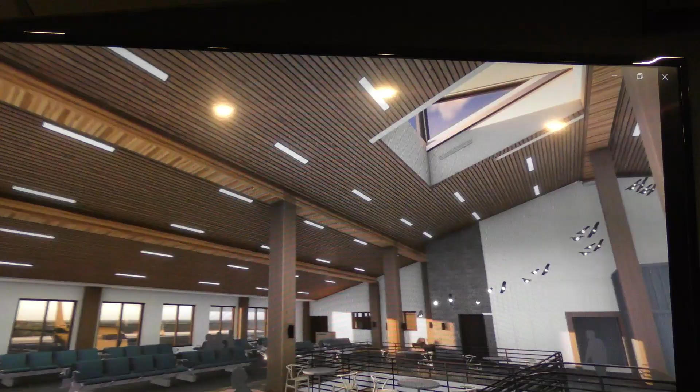And then as you look out across the second floor story, you're going to be able to see out over that Mount Edgecumbe back there. And then to the south as well, we're going to have some large windows so you can see in that direction as well.

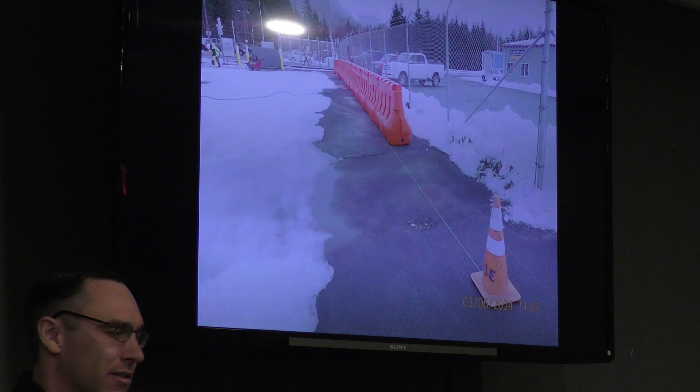So this is what it looked like before we got anything there. These are the barriers being delivered to the site. These are being expanded out and across the entire airport, and this turned the secured identification display area into a non-secured area.

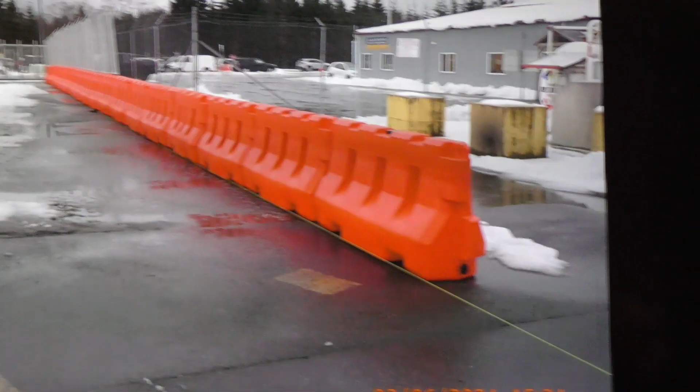So our individuals can be out there doing the construction, building out that temporary barrier out past the fence line there. The knife gate was removed. We went ahead and took that out, pulled that off the electrical system, and put in a temporary construction gate.

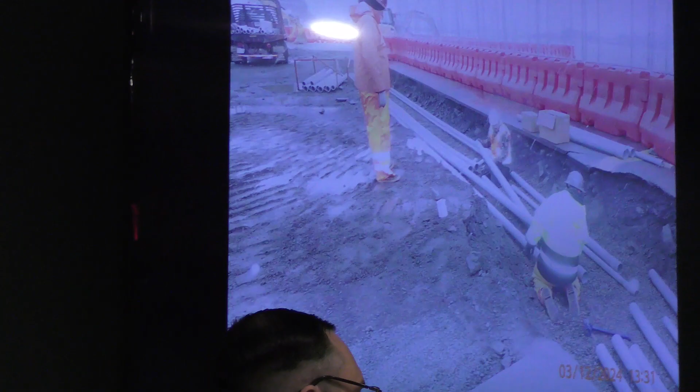One of the first things we had to do is remove the utility lines that are servicing the old building, and we had to bump those out past the addition. So we had to trench and put in a substantial amount of conduit outside of the footprint of the new addition.

This is us in the secured area, saw cutting through the asphalt and making our way over to the terminal building, where we had to get to the 480 junction box to make sure that we could continue to operate the jet bridge.

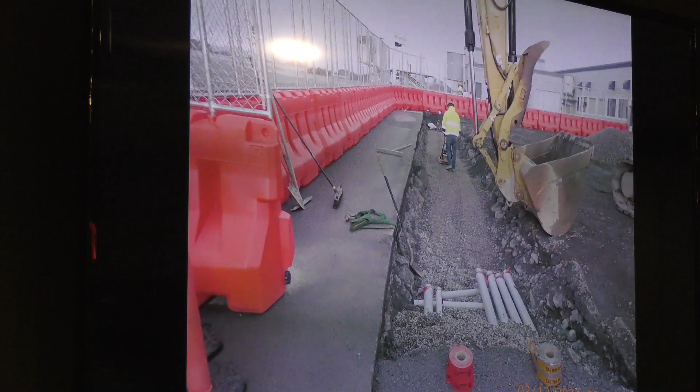During all this construction, it's been an extraordinary coordination effort between all the tenants, all the operators at the airport, and the construction team. We're working with GCI to unplug our fiber. We'll do another overnight, the third one this week. We did overnights Monday and Tuesday to disconnect the backup generator from the transfer switch. The goal is to keep operations at the airport completely contained, moving forward, and unaffected by the construction.

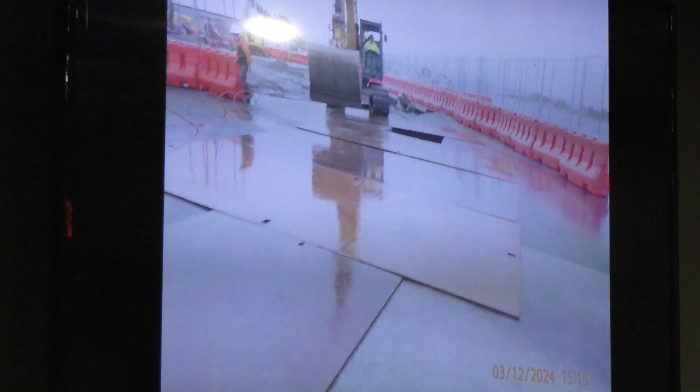These are a few more shots of us coming over with those utility lines. These are giant steel plates, about 1 or 2 tons. We had to put these in place over the trench so Alaska could continue to operate their baggage and ground support equipment, get into the bag makeup area, and continue moving those flights.

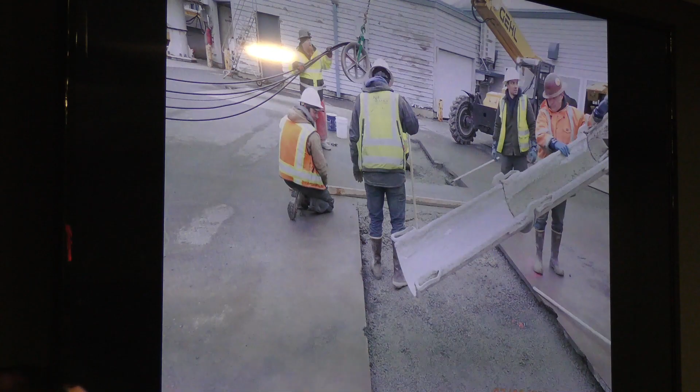After we got those cut and the conduit laid in the ground, we came back, poured some D1, and poured concrete. You can see in this picture we're running the electrical lines through these conduits as the concrete's getting poured. It's just a really good coordination effort - Sitka Electric, K&E, Alaska, and MCG have all been working very closely and very well together.

That's the end of the concrete pour there. That's us moving those concrete barriers back into place, turning that back into a non-secured area.

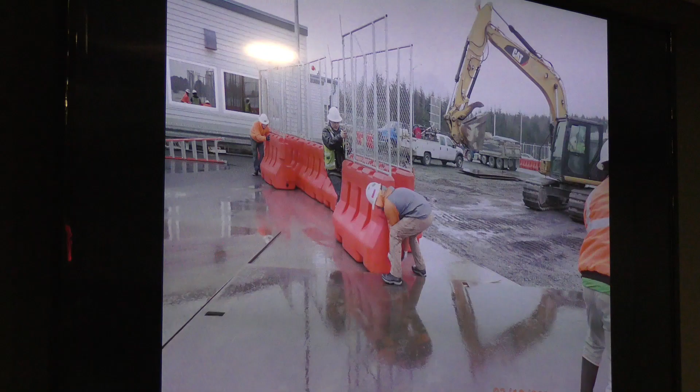This was the first power outage we did, on March 15th. We brought a backup generator out - we had 2 backup generators going at one time. This is the second backup generator, provided by Sitka Electric. This was supplying 480 volt power to the 480 junction box so we could continue to move the jet bridge and continue flight operations during the power outage.

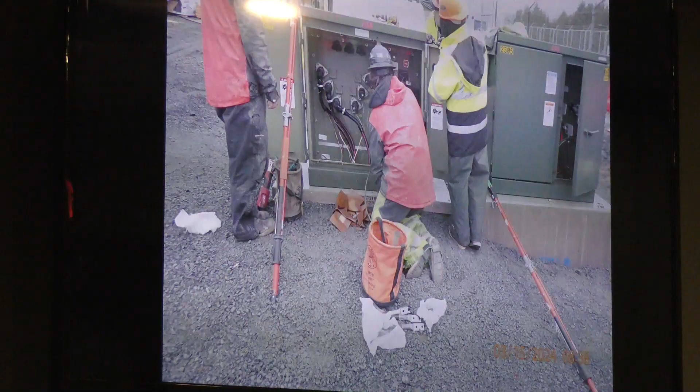This was staged at night, and the next day we came in very early. As soon as flight 62 got out in the morning, we went ahead and did the power changeover. This is everyone showing up early - a coordination between Alaska, K&E Alaska, and Sitka Electric. As soon as the power changeover was completed and concrete was dried, we pulled those giant steel plates. This area was kept clear for Alaska so they could continue operating.

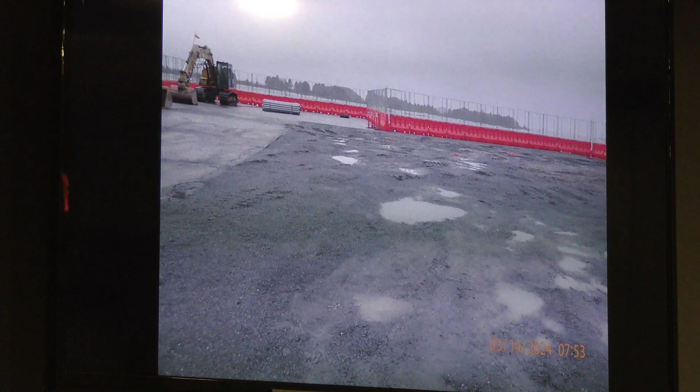This is a big panorama of the job site as we moved into the excavation of the new addition. It's going to pan around here to the right. This is after we saw-cut and removed all the asphalt - a big dirt lot. From here we started coming in and excavating.

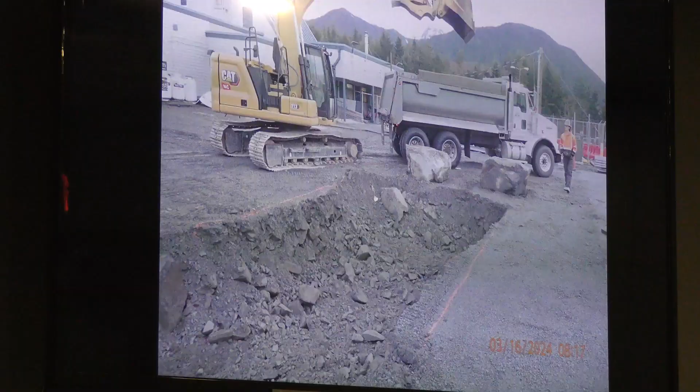At the same time we were excavating, MCG is building these large forms for the enormous concrete footers that are going to go on the outside of the terminal building. As these areas are being excavated, here are some giant rocks that we pulled out of the ground - those were a bit of a pain to move.

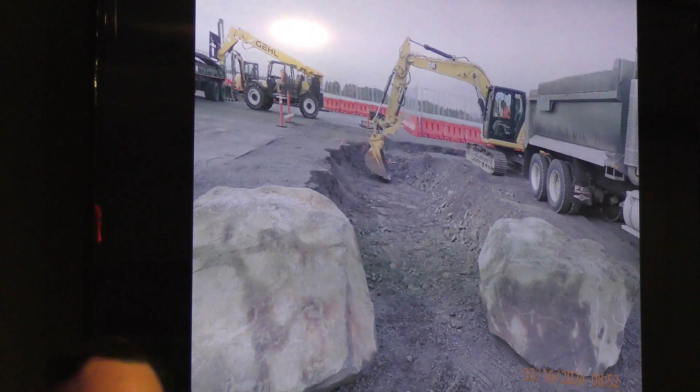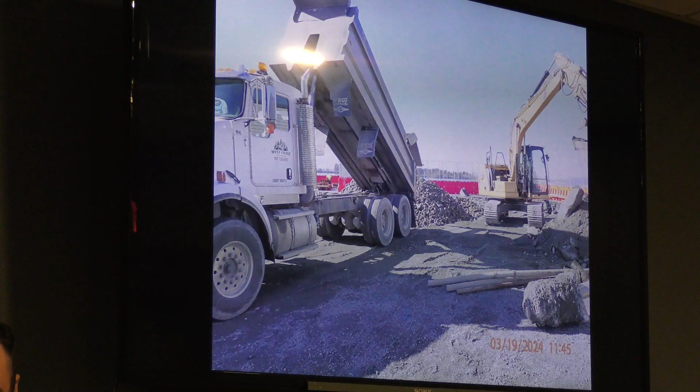As this excavation was going on, MCG is over on the side, and it's a very tight, limited construction area. As West Coast Excavation comes in clearing out the footings, the area where we're going to place these footings, MCG is over here building out the rebar and these large wooden forms that the concrete has been poured into.

So this is both MCG and West Coast Excavation working around each other, doing a great job of utilizing the space out there at the airport in our limited, non-secured area, pushing the project forward.

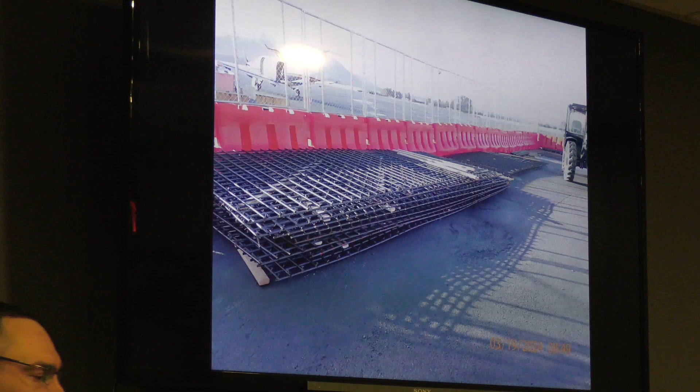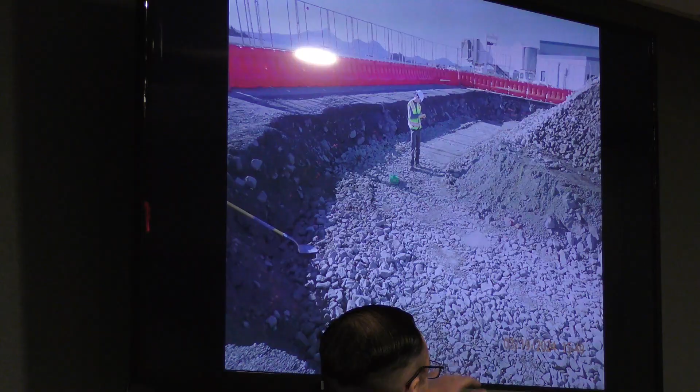This is Alaska Test Labs. They're coming out and making sure the excavated area is being compacted down. This device is actually a radioactive machine that shoots down and tells us if the compaction is good, if there's any air in there that needs to be pressed down. We're looking for about 95% compaction on this project, and we're taking measurements each time we come in with 4-inch rock, making sure that area won't settle and crack our foundation or cause problems with our buildings down the line.

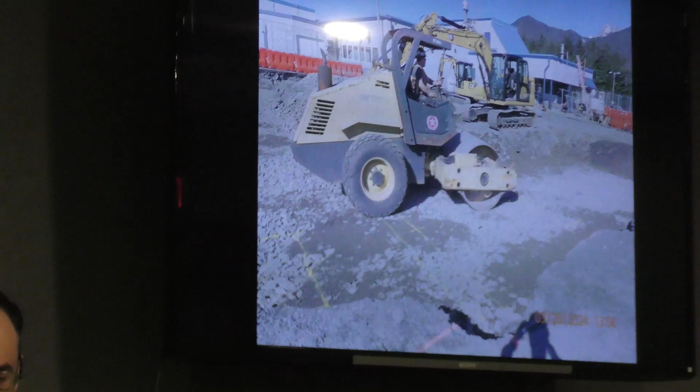Here's our compaction - West Coast Excavation using the roller, making sure we're meeting that target. At the same time this compaction work is being done, MCG is building out these enormous footers - these forms that are going to be our footers.

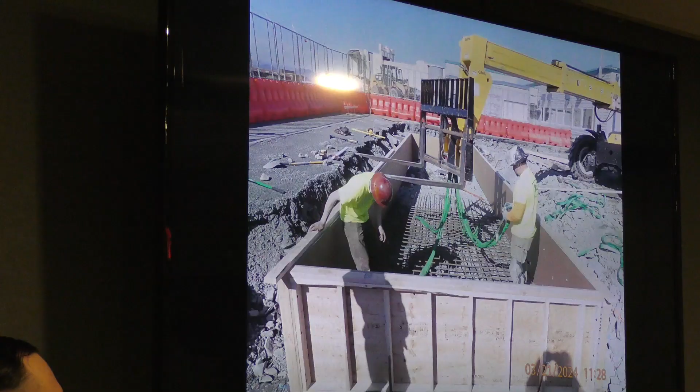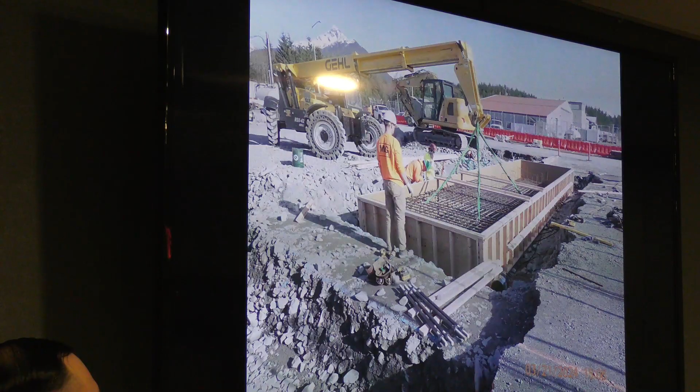That's more of the rebar being moved after the forms have been placed into the excavated area, being lined up at the same time. We're using this forklift to pull these fabricated pieces of rebar. The rebar's been inspected, so as soon as it's approved by the city, we move it into place in the form, and then we get ready to pour the concrete.

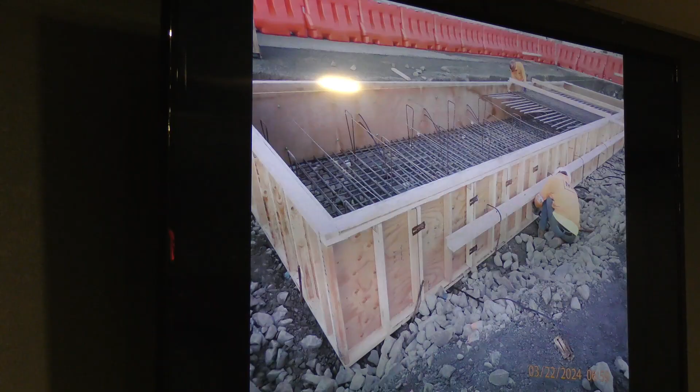So this area is coming out into the street. This is where our comms are located - our communication cables, our fiber, and our coax. This is in the way of the construction area. We need to put down water and sewer, and so this is one of the things we're moving this week.

GCI is in town. They are flying their people in over the next couple of days, and they're going to be looking to do a temporary stoppage of service for Alaska at the end of this week. That's going to be the second outage of this week, and we're going to be looking to do that overnight, Friday night into Saturday morning.

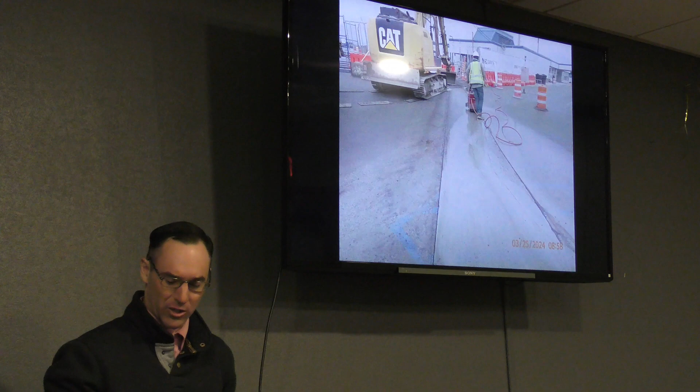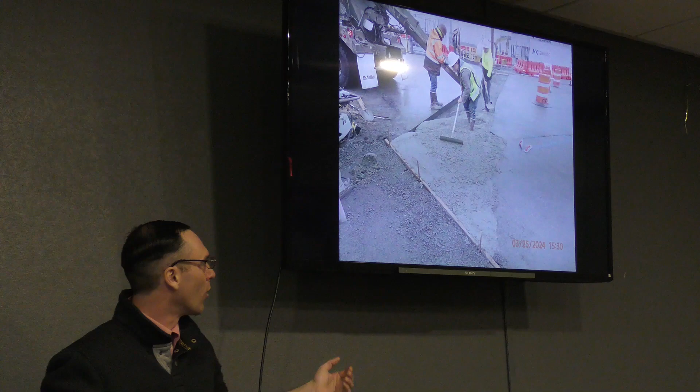So we came through this section, we cut across here. You may have noticed if you drove to the airport lately, there were some big steel pads over this section - that's what we were doing here. As soon as we got this dug up, we went ahead and laid some conduit down across the street. Then as soon as the conduit was in the ground, we poured back over that. And as soon as the pour was back over there, we put some giant steel plates over that so people could drive over and continue to utilize this area, keeping the operations of the airport moving.

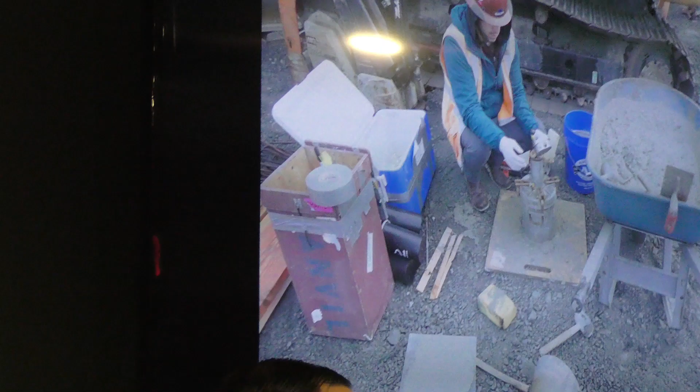So this is the beginning of pouring these giant footings. One of the things we have to do to make sure the concrete is what we want it to be is test the air and do slump tests. The slump tests have been right within what we're looking for - about 4 to 6 inches, and it's been about right in there every time. We're looking for about 4% air; that's what we're testing here.

We're pulling out samples and shipping those samples up to Juneau to be compression tested. Currently, everything's been breaking over 4,000 pounds. So at the first measurement, which I believe is about 8 days, that's been within 4,000 pounds. As I understand it, it's logarithmic, so it's going to continue to go up. We're meeting our goal, and we should actually exceed our goal as the project goes forward.

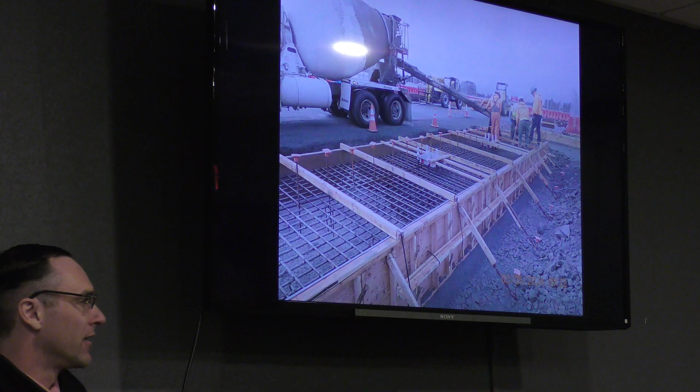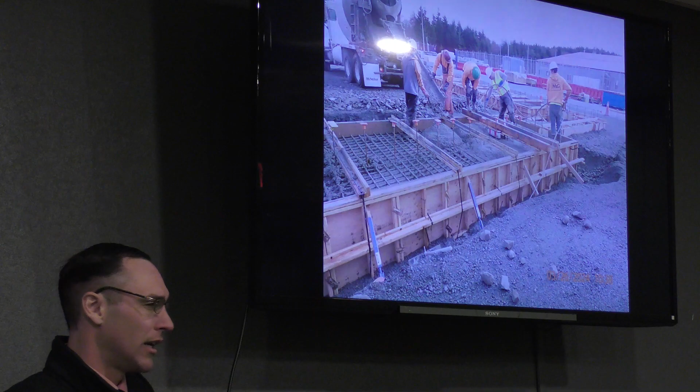So this is us coming in and pouring concrete into these giant footings. This was about 13 cement trucks - we had 3 cement trucks operating at the same time at the beginning of the day, that turned into 2 cement trucks. As one cement truck was finishing, we just had another one coming in right behind that to continue the pour. A lot of concrete went into these. Each day, I want to say it was about 12 to 13 different cement trucks for each single one of these footers we came through on.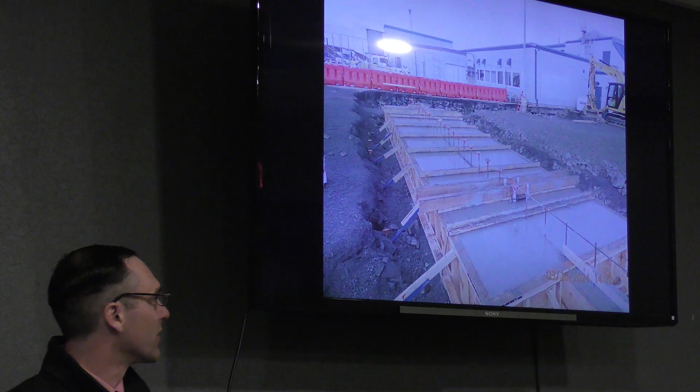And that's where we are currently. We have 3 of these very large footers on the airfield side of this work site, and now these are covered by plastic tarps to make sure that it's curing evenly. We're keeping the rain off of it - we're just making sure this is as happy as possible.

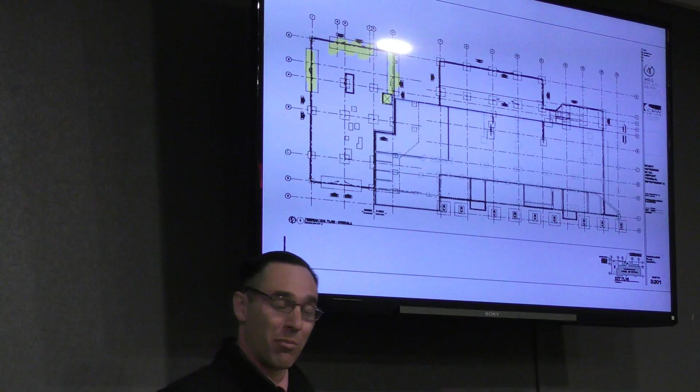So that's pretty much what I have to show you of the construction that's happened so far on the project. Right now, I'd like to apologize for the adverse effects we're having on the Nugget and explain why exactly some of the construction you're going to be seeing over there over the next few months is happening.

So going forward, this is the Nugget here, and we are going to be putting this footer down, and we're going to be affecting this wall. We are also going to be building a temporary baggage tunnel moving from the TSA section here, over through the Nugget, and then out onto the airfield side. The reason we're doing that is because we are in phase 1B, moving into the south area of the terminal and putting in these footers here.

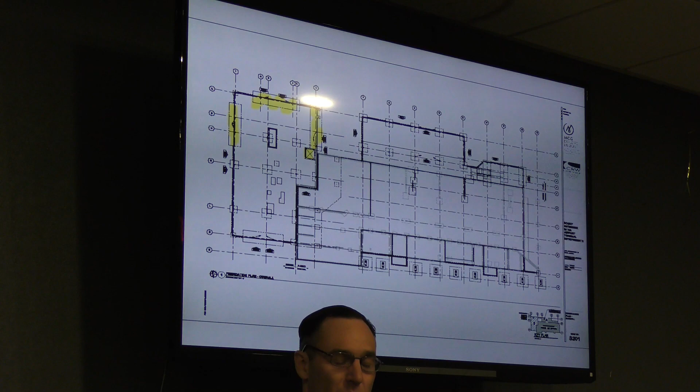What we were looking at is any way we could keep out of the Nugget, but unfortunately, the clearance between our baggage tunnel and these footers is less than a foot - within 6 to 8 inches - which would not give the construction team enough space to do their work. So what we ended up deciding, we couldn't come out here because of the passenger flow, so we had to stay out of that area and this area, which only left, unfortunately, going through the Nugget. We're going to try to keep this as abbreviated as possible, so we're not having too much of an adverse effect on the Nugget, but unfortunately it's going to have to be a part of the project.

So we're going to be coming through with our temporary baggage tunnel, eliminating a little bit of their space as we move out and into the airfield.

Very much apologize, we tried to avoid it. We did everything we could, but it is going to be necessitated by the project. We're going to try and keep that as short as we can.

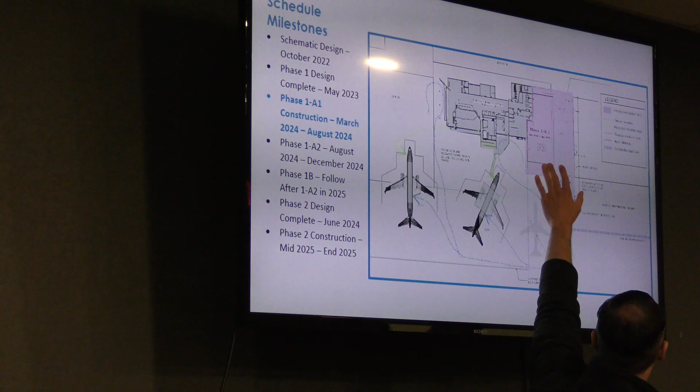So here is the current project area. This here is our temporary fence line, and here is the addition that we'll be expanding and building out over the next year.

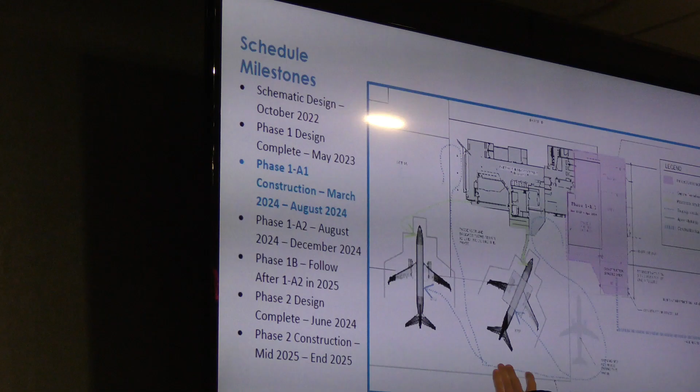What we're showing you here in green are the passenger footfalls onto the plane, as well as when we have two planes boarding at the same time, coming out of the breezeway and ground loading onto the planes. This also shows the traffic of the baggage makeup and how it's going to be moving through the airfield.

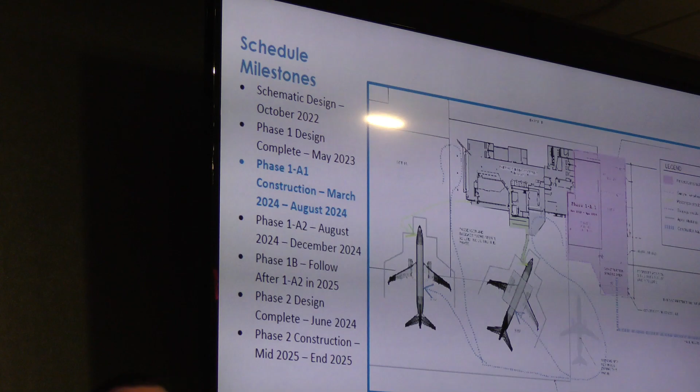That's expected to last until about August, at which point we're going to be moving into phase 1A2 and phase 1B. That's what this is going to look like.

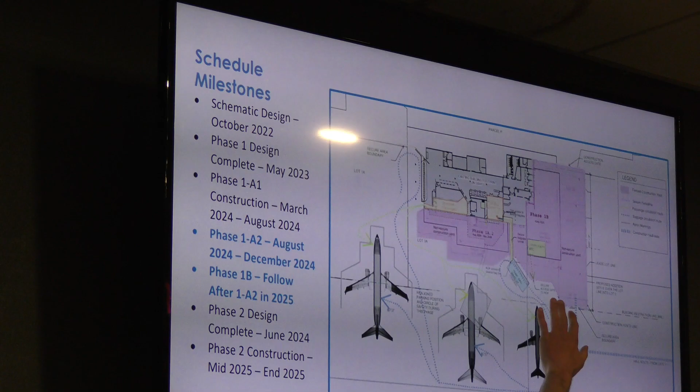So this is where I want to give you all a heads up. This is where we're going to be ground loading. As we come into the back of the terminal area here, this is our temporary baggage makeup situation that's cutting through the Nugget, and we're going to be extending the temporary fence line out into the airfield. That's going to eliminate our jet bridge for at least a little bit of time.

So from this point, from August through the winter, we're going to be ground loading the planes. We understand it's going to be difficult. We're going to make accommodations as much as we can, but please bear with us. This is expected to take a number of months, so expect when you go to the airport after August that you will be ground loading, and we're going to try to make that as painless as possible.

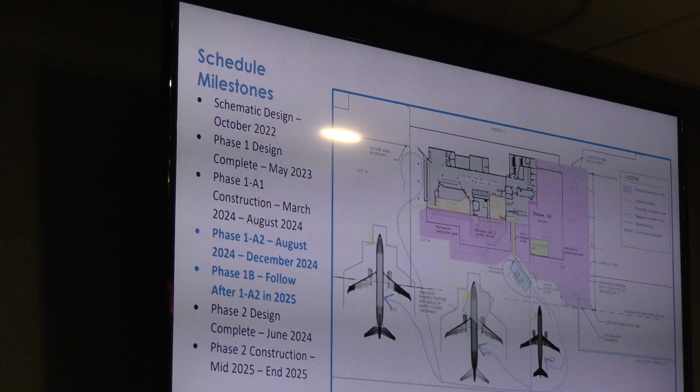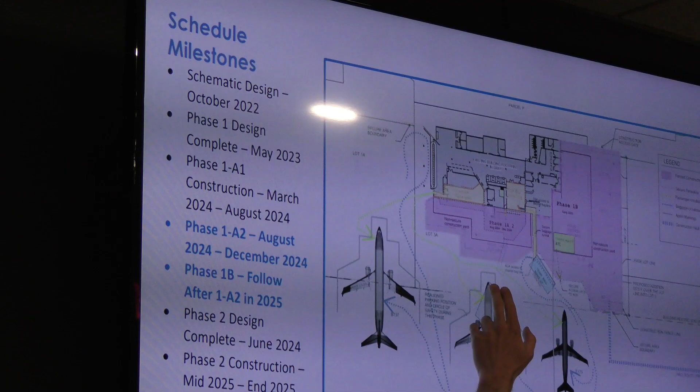So these are the footfalls you're going to be taking. You're going to be screened and put into a sterile holding area, a passenger hold right there. You'll exit the building over where the baggage claim currently is, out onto the airfield, and move along these large stanchions. It'll be sectioned off, you'll know where to go, it'll be very clearly delineated, and you'll be moving through these areas out to the planes.

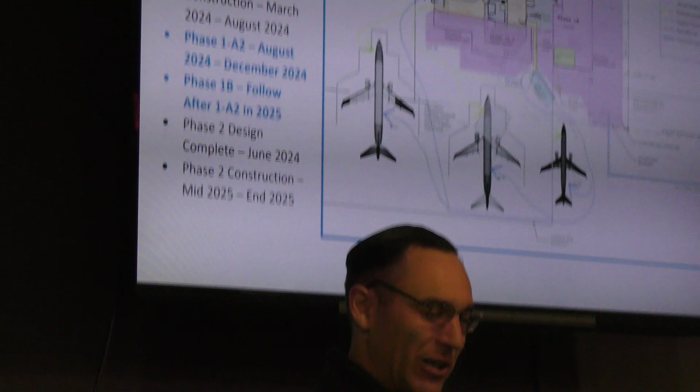That's all I have for you this afternoon. Thank you for your time. Do you have any questions that I can answer?

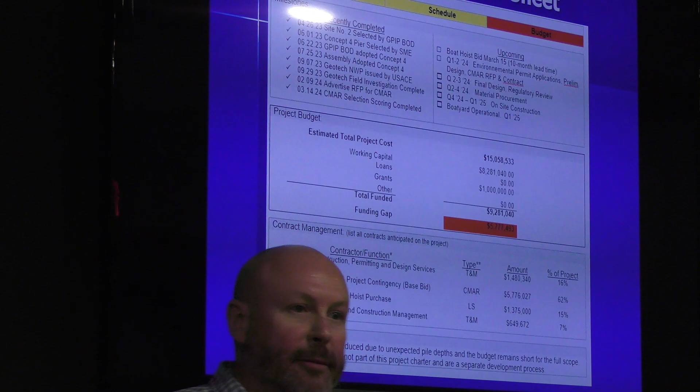So here's our project charter. Over here, this is a lot of the stuff that's been completed, and I'm going to go over that. And then this is the stuff that's coming up. You can see our total budget for everything is $15 million. We have secured about $9.2 million, which leaves us about 5.8 short. So I'm also going to break down here in a little bit what that entails and what that does not entail, but I want to go over some of the project outline here.

So we started out, that vote passed in October. By November, we had the project charter developed, we had it in front of the board, and we had that approved. In December, we put out an RFP for professional services to have folks come in and help develop, be port planners, and have a subject matter expert on it. That went out, and once we got through the advertisement and response time, we had a group, PND Engineers out of Juneau, by March.

They immediately came over, started working on the site, started doing some geotech investigations, looking at everything and getting some plans together. They conducted bathymetry, site surveying, and other investigations. So now we had a good idea of what was out there, but we hadn't really figured out what site it was going to be in, because there are multiple places in the industrial park. So we had them develop what was called a decision matrix that looked at cost of construction, operational efficiencies, expansion opportunities, and overall risk to the project.

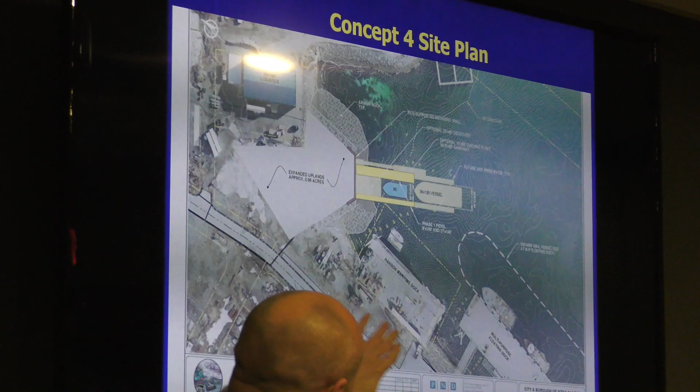So this is our site plan that we came up with. You can see this is the old SIAC Logistics old boat company building, which is now back in the city and borough's hands. Here's our multipurpose dock, here's the Hanson Maritime Dock, and our existing ramp was here - this is where it's going to be at.

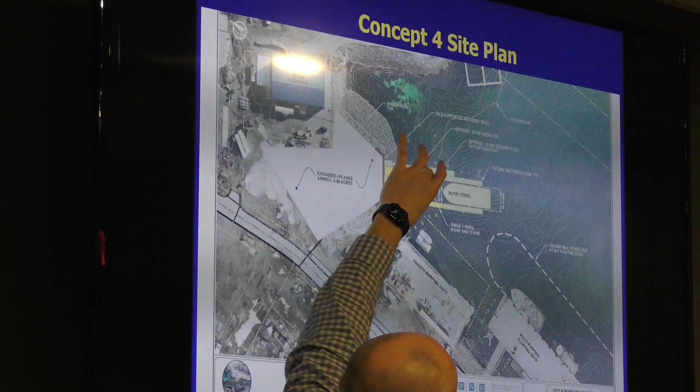We're going to come out and build out here that allows us to take a 150-ton lift, but we can also expand it in the future using the same footprint to come out and do a 300-ton lift in the future. And so that was our original design.

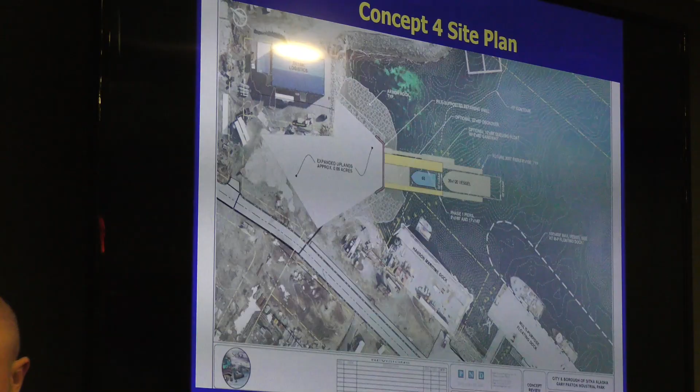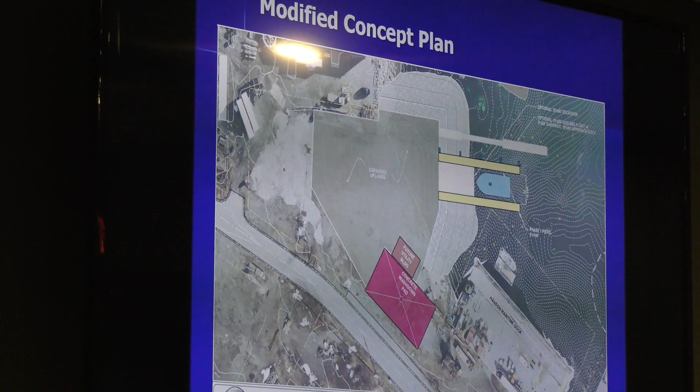Then we had to move into this because we found out we had some additional costs due to the geotech investigation - it was deeper water than we anticipated, and everything we looked at suggested it should not be, but it is. So we had to come back and modify the design, as you can see here.

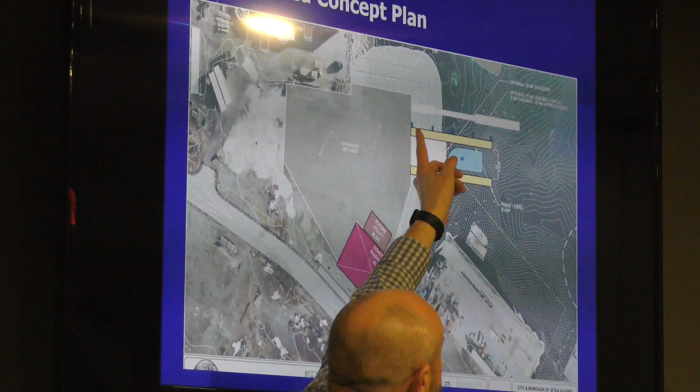We had to take this thing, which was really wide before, and narrow it down. So we have these structures built to be able to haul a 300-ton lift across it. We narrowed this - this is going to be built for 150, but we have the pilings driven in there that we can expand off of if we ever move forward. We don't have to come back and drive new pilings.

So, and of course, there's our washdown pad. Boats will come off, they'll go over and get washed, then they'll come over here to the yard, which I'll show you.

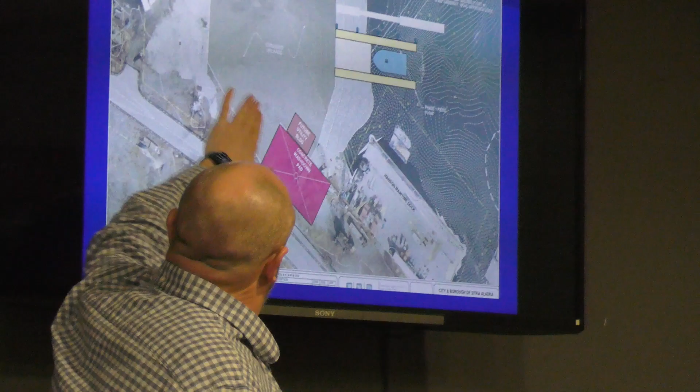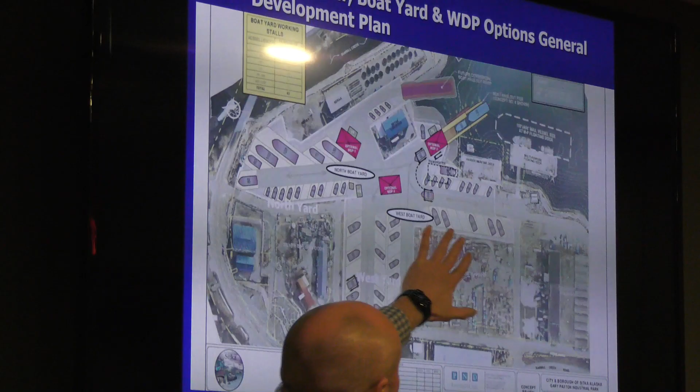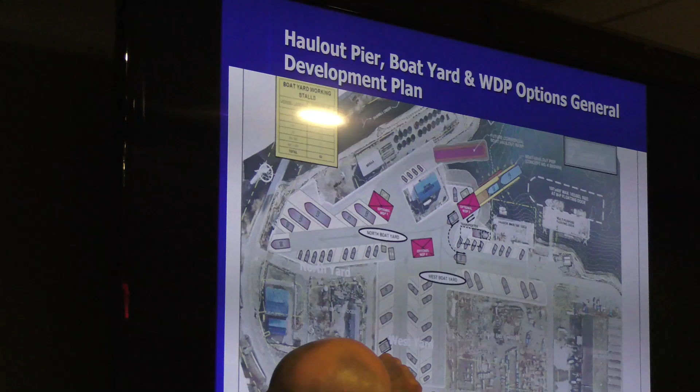So this is the north yard and this is the west yard. Right now, we only have funding to work with the north yard. We're considering this phase 1 of the project. Phase 2 then is to come into the western yard at some point. Boats will come out, they'll get washed here, then go into different parts of the yard.

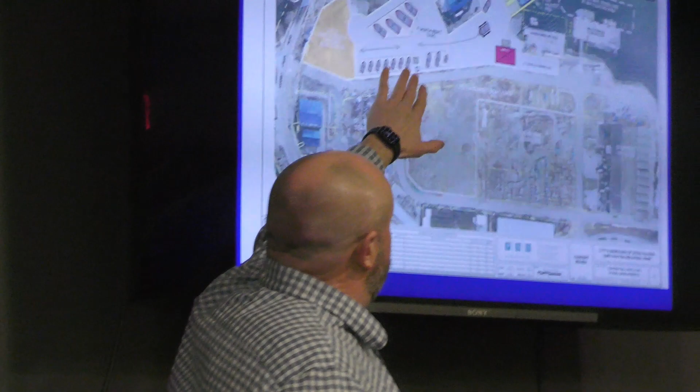We also have another concept, maybe instead of using all these sites for lots that are leased to welders and whatever else could go with that. There's a lot of that stuff that hasn't been figured out yet. We're just trying to build stuff to get boats out of the water in a quick and fast manner as possible, since we do not currently have a haul out.

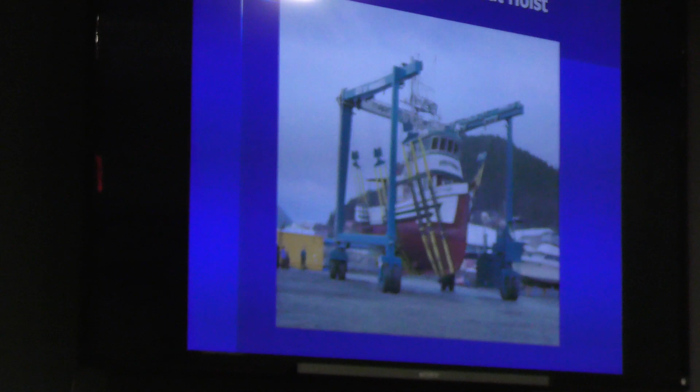So I want to talk about some of our next steps. We still have to do environmental permitting. This is the thing that's dragging this along the longest. We could go start putting piling in the water tomorrow, but we have to follow all the federal regulations. We can't put stuff in the water because we haven't finished our design.

One of the things that just happened is our engineers came together with a 35% design. We took that design out and put out bids for construction companies to bid on it. We selected a group called Western Marine last week. These folks will now work with our engineering team, the public works team, and myself to come up with a 65% design, which will turn into a final design, which will get us closer dialed in on those costs and see what's going to happen.

Also, concurrently, we have an invitation to bid out to buy a piece of that haul out hoist. That's out, it's due April 16th.

We're also working on who's going to operate this haul out. Is it going to be a municipal run facility, or a private run facility? We're developing an RFP similar to what Kodiak did, looking at if a person wants to operate it, what cost do they want to charge to do that, and do those costs fit in line with what the fleet's willing to pay or not. That's going to be a negotiated, ongoing process. We're trying to get that out as soon as possible.

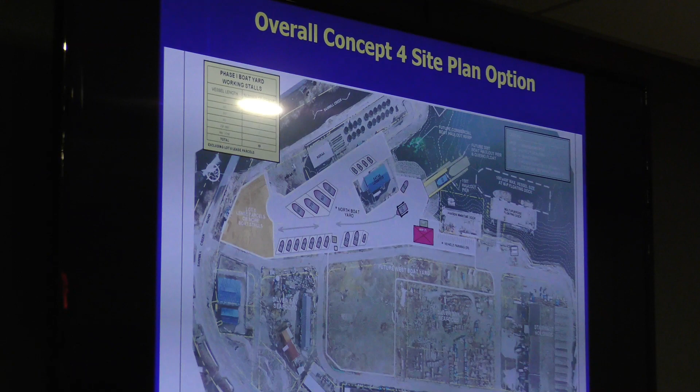Melissa and I have been working on another Denali Commission grant, because nowhere in the park plan is there any electrical, and we've heard from folks that want to use this that they want power pedestals at each of the boat stalls. So we've got a grant out there we're looking at. Since we have no money to match anything, we're asking the Denali Commission for 50% of the amount just to get power into the north yard.

And then we're going to leverage that to go to the EDA Public Works program and hopefully get some more money for that. Of course, we're continuing to look for additional funds because of that 5.8 million delta, plus we've got whole phase 2, plus we've got electrical.

So the main goal is we had a shoestring budget. We figured out the best way to get boats out of the water, get them on the deck, and then try to figure out what we can do to improve on this in the future. But the main point is just to be able to get boats out of the water. So I want to offer Michael, you want to say anything, since you're running a whole other part of this? Yeah, I appreciate that.

Only thing I would stress, as Gary mentioned, we are short of funding on that first phase. So when you look at the drawings we're showing today, that's our future goal. We won't get there right away, but hang in there as we keep going for funding. That first amount we have right now really isn't going to produce that north yard even yet. We're just building the marine infrastructure right now, so I don't want to surprise anybody when you go out there and the project's done first phase at the end of this year and you don't see all those parking stalls and all that.